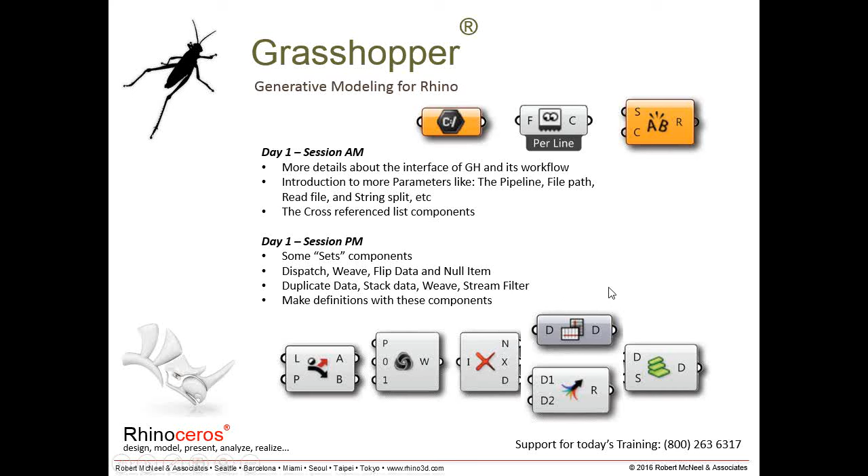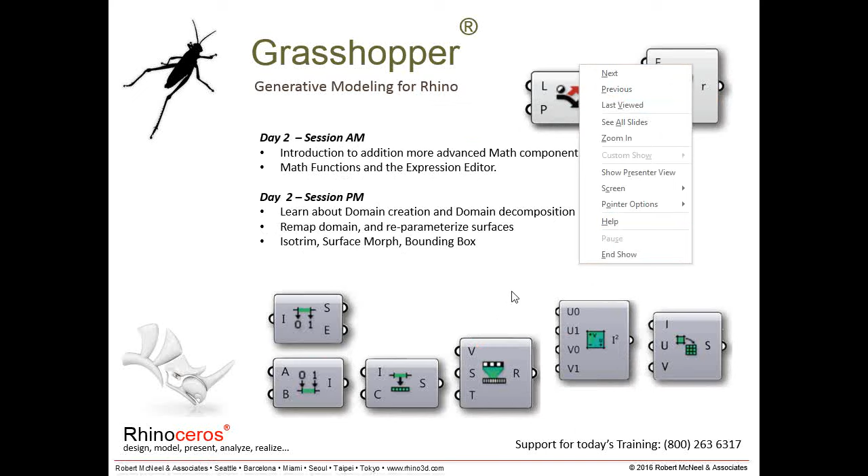One of the big topics for this class, as you saw from the outline, was working with data: splitting lists, using trees. We'll go over each of these outlines at the beginning of each session. Also domains and series, remapping domains, isotrim, morphing, surfaces and bounding box, math expressions, and some more advanced math components.

Parameter viewer, manipulating trees, flattening and grafting trees, exploding, merging, and flipping the data matrix. And then just making sure we get through lots of examples of working with trees, branches, and data components. So what I have for you is just some examples of the definitions that we'll be putting together.

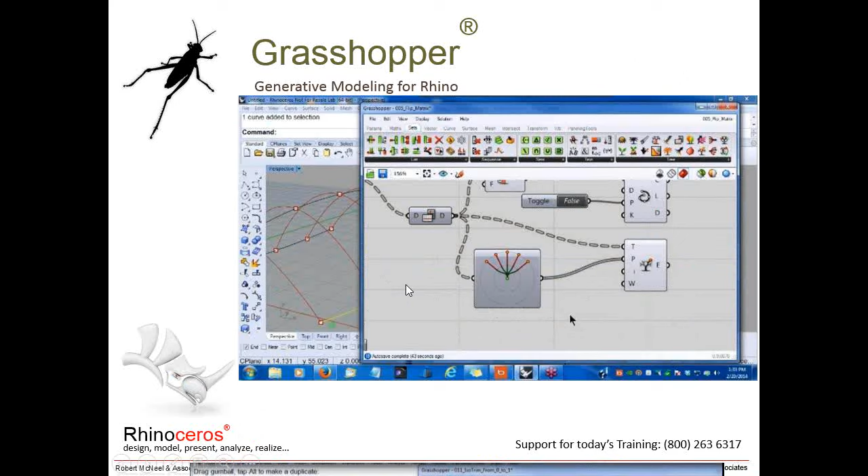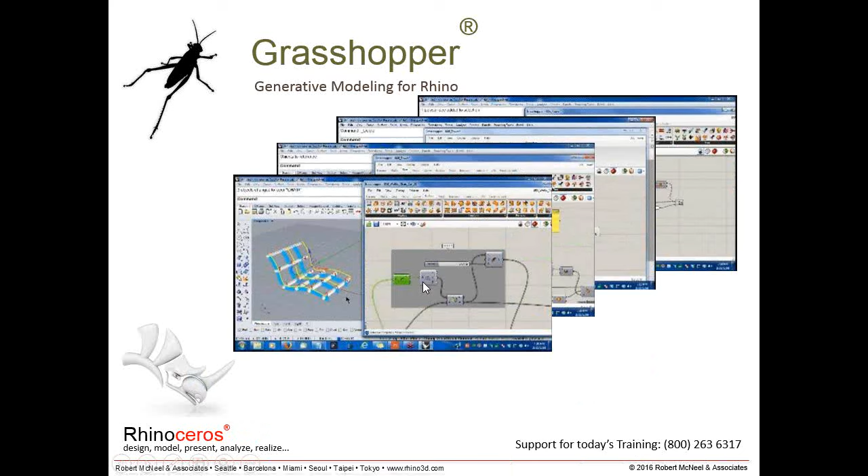So a graphical way of looking at what we'll be doing. And at the end of the training, that's our last definition. I just wanted to give you some idea of how quickly we move into the advanced material.

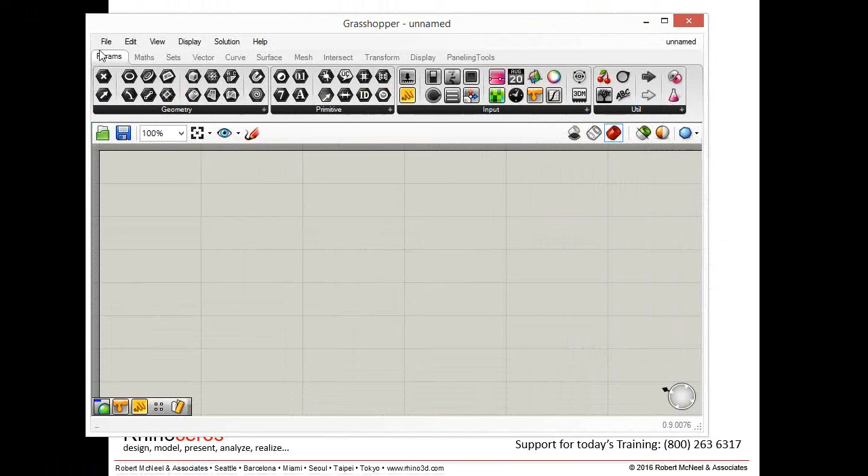The last thing I want to talk about is the path to components and parameters. If I take the curve parameter, I'll say it's located on Params, then on Geometry, and then I'll give the description of the item - so usually one, two, three. Those are the things that I will be chatting: Params dash Geometry dash Curve would be what we'd see in this case. That's really important. If I go to Vector and Point - this is the Construct Point - I'll say Vector, Point, Construct Point. Notice there's also a Deconstruct Point that looks similar but is very different.

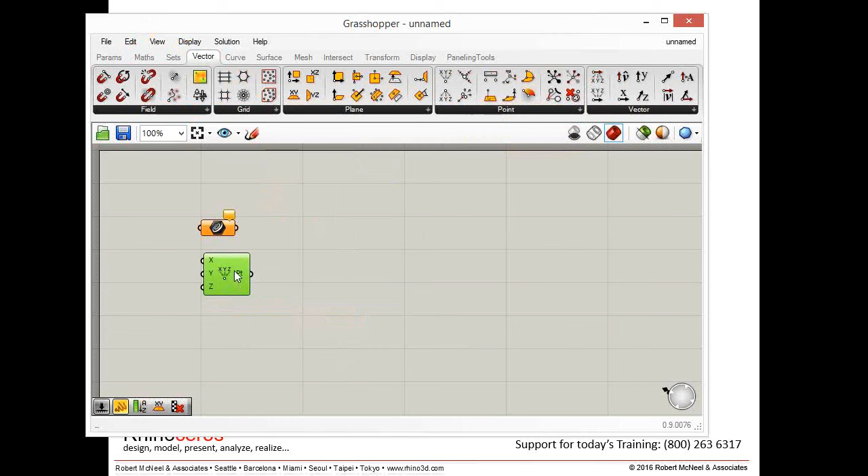If you can't find a parameter, we have a nice option where you hold down Control and Alt, which is really important as you're looking at Andreas's definitions. If you hold Control and Alt down and press on the component or parameter, the Finder will show you where it's at. One option is to double click on the canvas and type in the component or parameter you want to use. After you find it that way, you can hold Control and Alt down and it will tell you where it's located. So if you know the component you want is 'Random,' find the little kitty cat picture, hold down Control and Alt, and it will tell you where it's at.

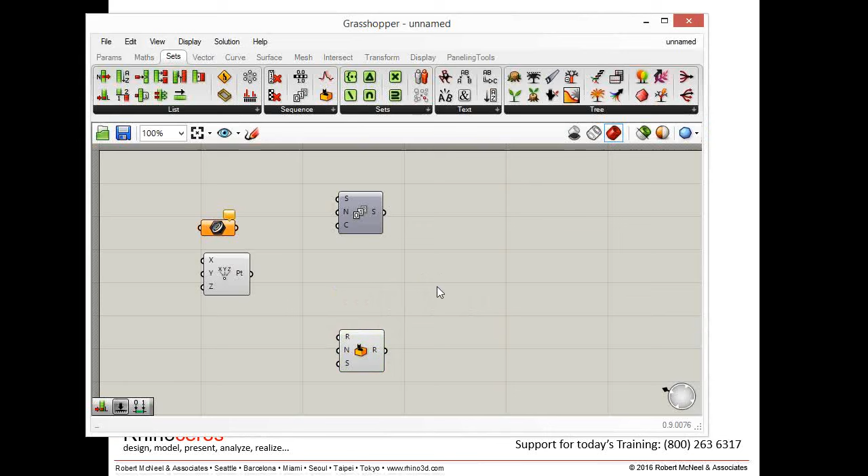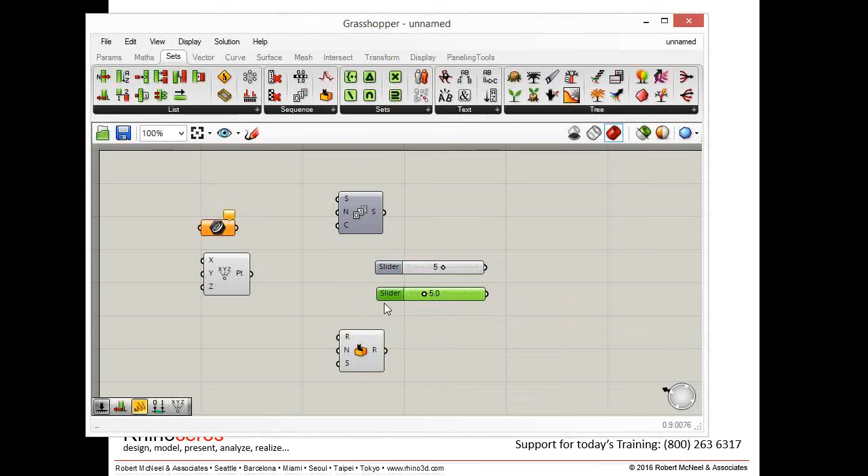That's a really effective way to find a component or parameter if you get behind - double clicking on the canvas and typing. If you type a number, you get a numeric slider. We can type in where we want the numeric slider to start, what value we want it set at, where we want it to end, and the precision. That's something you'll see Andreas do a lot, and if you weren't in a Level 1 class, that may go by really fast in the beginning.

Just a couple things that I know will be really important as you're trying to keep up with the training. Unfortunately, as you're watching the training live, there isn't a way to rewind like you can with a video, so let me know if you get lost or need help finding something. Here are some tips that will keep you up with the class, even if you get distracted and start working on a problem while Andreas is carrying on with the class. So with that, let's go ahead and pass the screen over to Andreas.

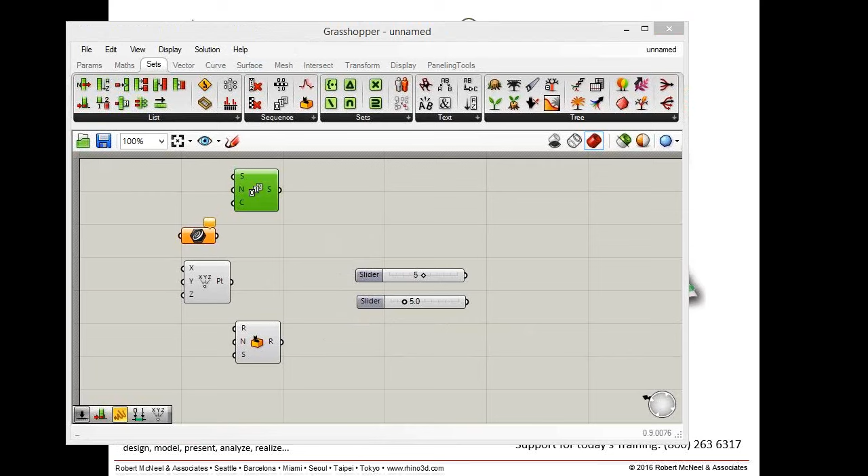So I saw that maybe 30% of the students took our Level 101 class, so I might go over a few things before we continue.

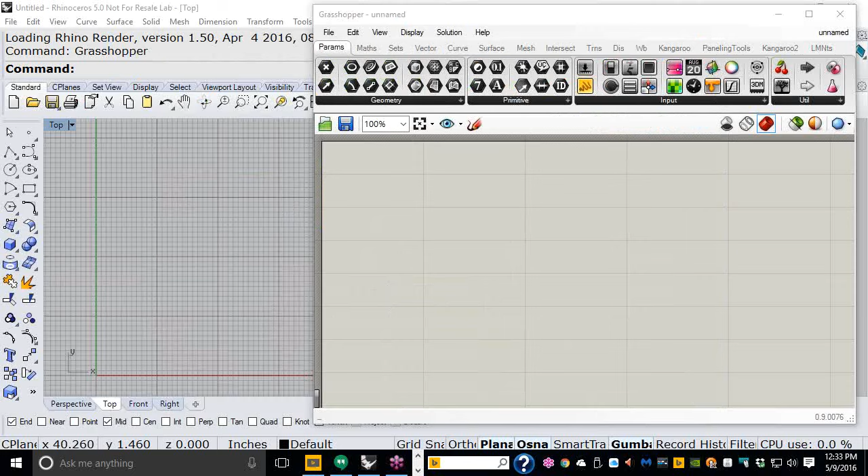Number one, I do want everybody to make a folder. It's a no-brainer, please make a folder. This is Level 102, and inside that folder, make one for day 01, another for day 02, and another for day 03. If you behave well, we might have the last one.

I am going to save all my definitions in each one of these folders, and at the end of the class I will zip all of them and send them to Mary, and she will do her best to post them the same day. So be aware of that.

Let me minimize this. Second, for this class you can change it later. Next week you can go back to how you prefer to work with Grasshopper. But for this week, for tech support, and if you have questions, we might be able to log into your computer and see what's working and what's not. So we need everybody to have almost the same interface with Grasshopper.

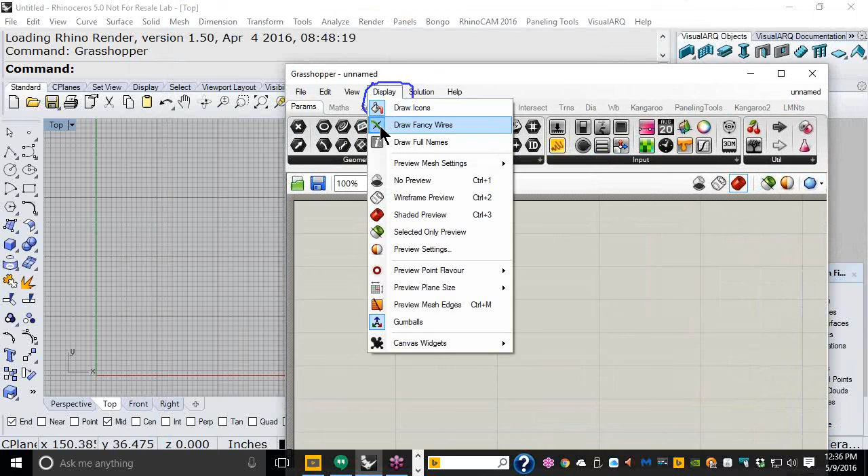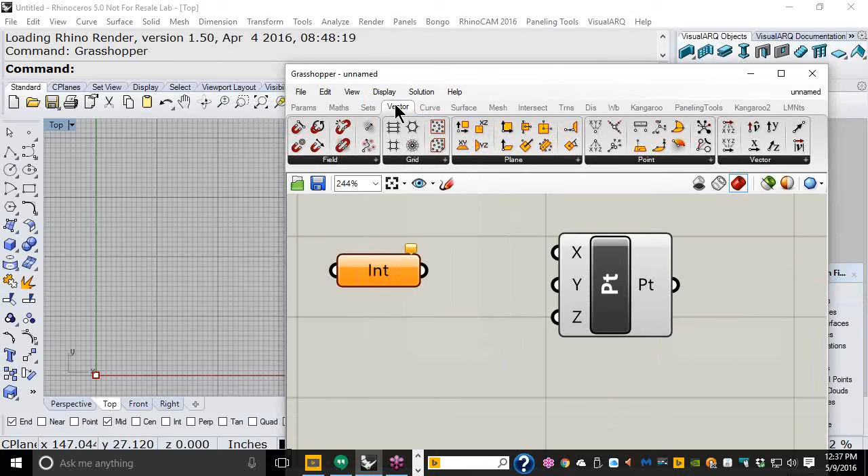Second, I do prefer for this class, as soon as you drag and drop either a parameter or a component, I would like everybody to use icons. You can set it to labels, that's fine, but after this class, not during this class, because it's quite easy for me to identify the icon and to help everybody if you send us a definition that is not working. Perfect, so now we have Draw Icons and Fancy Wires.

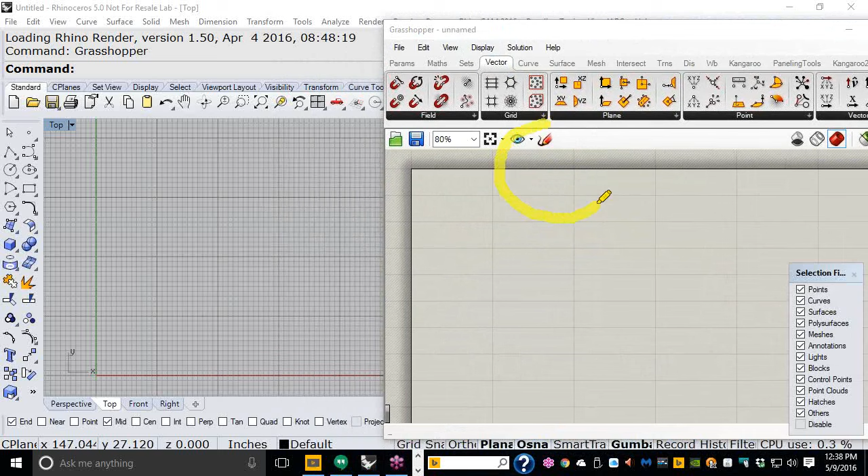Let me delete. Perfect, the next one — this is something I use from time to time on my definitions. I like to draw — let me show you where this one is, right there. Let me erase it, go back to normal. I like to draw something like this. But I can set, okay, that's what I want, and of course you can change the type of line, maybe this one, maybe you want it red — it's up to you. Once you say okay, I want you to see this, this is really unique and will organize things for us.

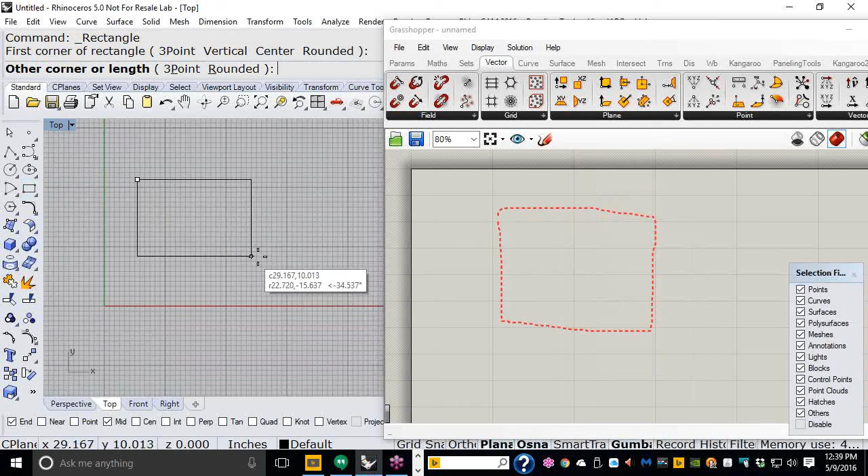I can come to Rhino. Notice that I am in the top viewport, and I can draw a rectangle right there. And I can right-click on this diagram and say please load from Rhino. So left click, select, enter, and there we have it, right there. Beautiful, beautiful, I hope you like that one.

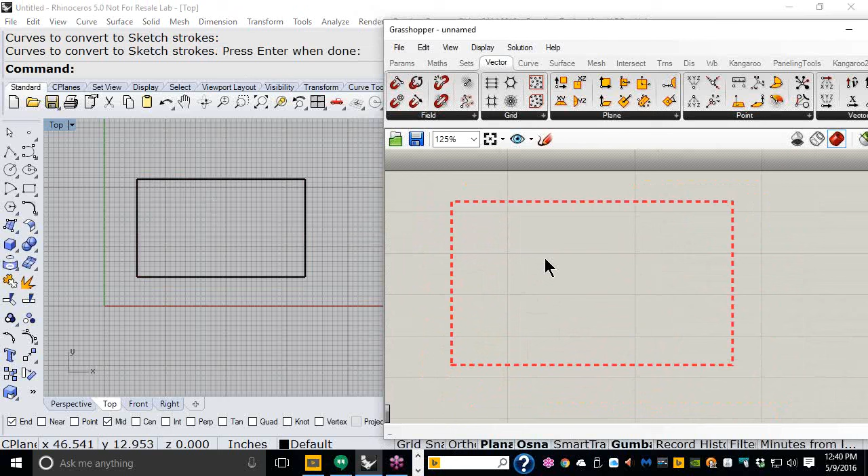I use these helpers to allow me to organize my definitions. And of course I can draw many things — I can draw a few things like this, load from Rhino, select all of them, enter, and there you have it. So you can bring almost any object you want.

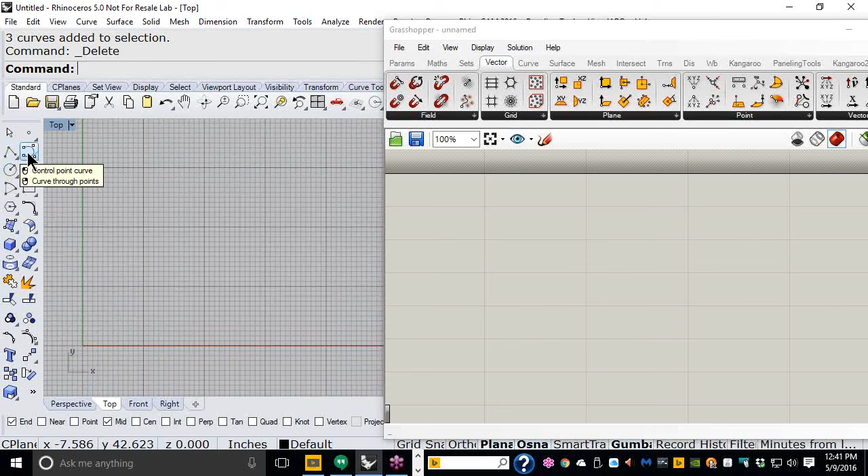Perfect, let me delete all of these and start explaining a few other things. We're going to start drawing 3 curves — they could be polyline, interpolated, or control point curves. So I'm just going to draw in the top view. Please notice I am not paying attention to the units yet.

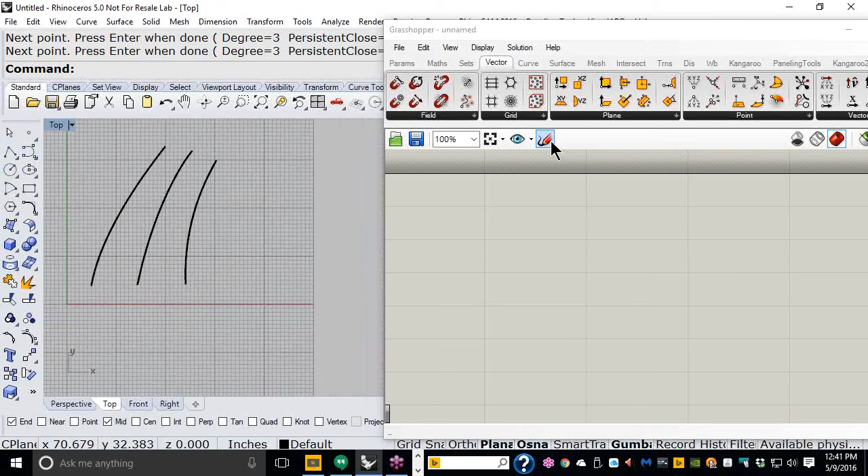How come that didn't work? I see somebody on my chat. It's quite easy: first you draw something beautiful — please do not copy my beautiful design. Say OK, then you select and right-click, and choose Load from Rhino. Go to Rhino, to the top viewport, select, right-click, and don't forget to drag — they appear right here on the top, so you have to drag them inside. Maybe that's what didn't work.

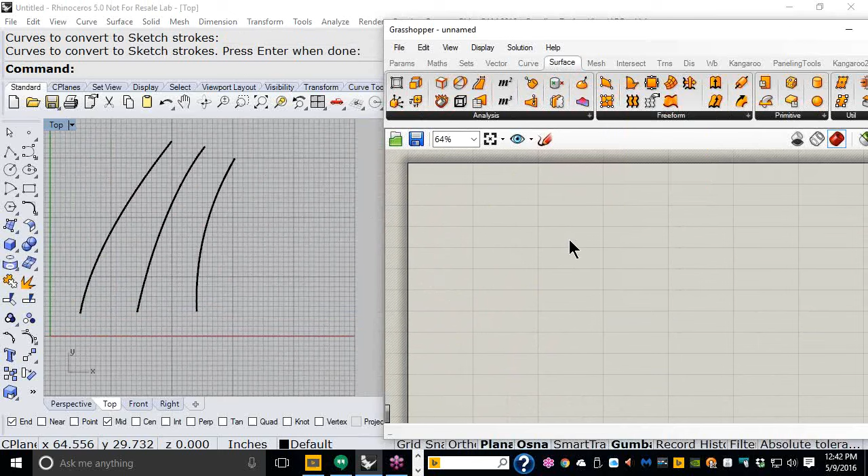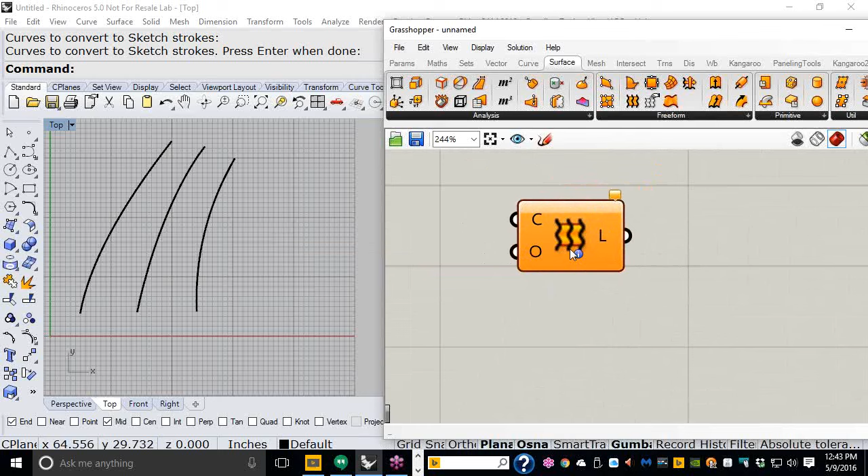Okay, so now that we have these 3 curves, I am going to go to the Surface tab and choose the Loft component. So drag and drop the Loft component right here. From time to time, so that it gets saved on the video that Mary is doing for us, I love to press Control, Alt, and left click — that will give you the path from where that component or parameter came. So we have the Loft over here.

And I need to select these curves, so I go to Parameters, and under Parameters let me drag and drop a Curve right here. Perfect. Let me zoom, right-click on the curve, select multiple curves, let me select all of them, enter. And now I am going to connect those 3 over here.

I know it is working because I drew my curves in order, and we're going to fix that later. We're going to be able to draw all the curves in disorder, and the Grasshopper definition should be smart enough to organize everything for us.

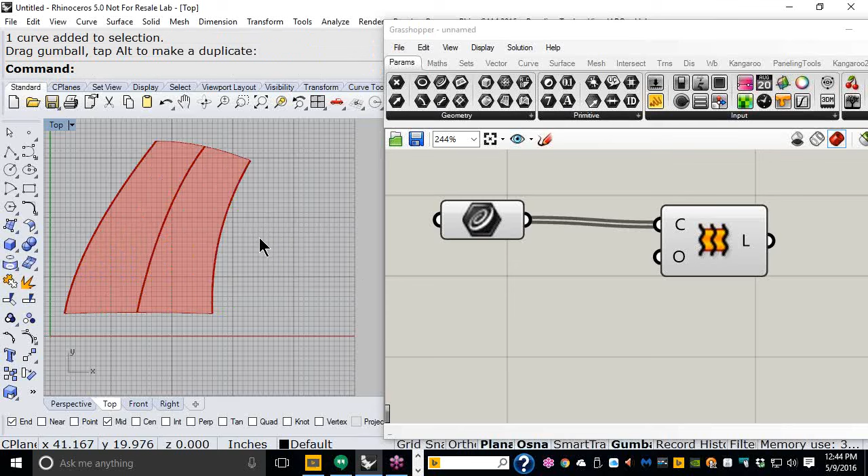So this is what I want to do, this is what I want to show you. If I right click on this parameter and go all the way down here, many people that use Grasshopper forget that we have this possibility. So I like to bring it at this point, and we can internalize those three curves.

So if I internalize there, and I go to File, Save, let me come over here to my computer, right there, day one. So this is my 001 definition. Internalize curves.

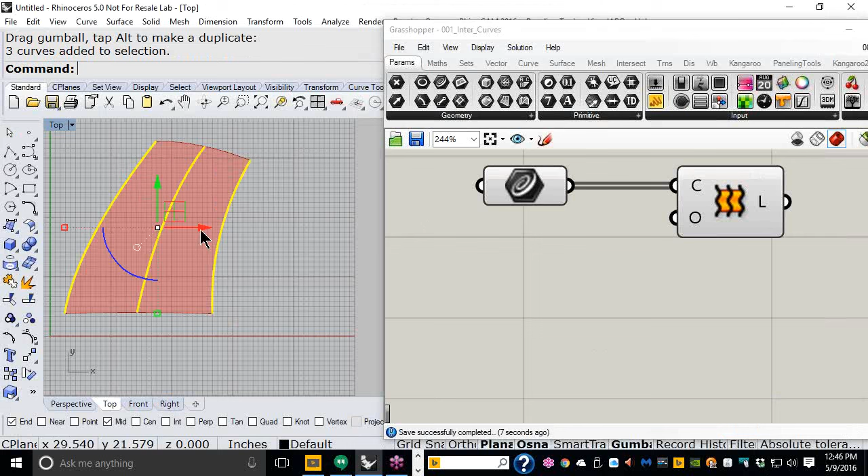If I save that little piece of definition, Grasshopper is going to save the curves. Notice, I'm going to delete my curves. I'm going to close, do not save there. If I go back and reopen my definition, bingo.

So I was able, just by selecting internalize data, to allow Grasshopper to save both the definition and the data from Rhino. So both will go into one file. But, there is always a but.

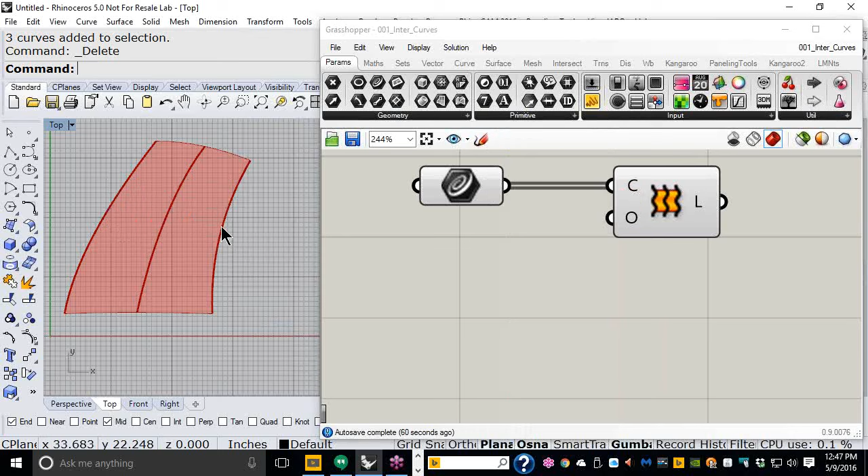Notice that I cannot select the curves. The curves are inside these parameters. So what do you do? You right click and you bake them if you need to use them. So let me bake them over here. And now notice that the curves are over here. Beautiful. And now I can pre-select them one more time.

All right, so be aware of that. Be aware of that. Let me select 1, 2, and 3. Enter. Beautiful.

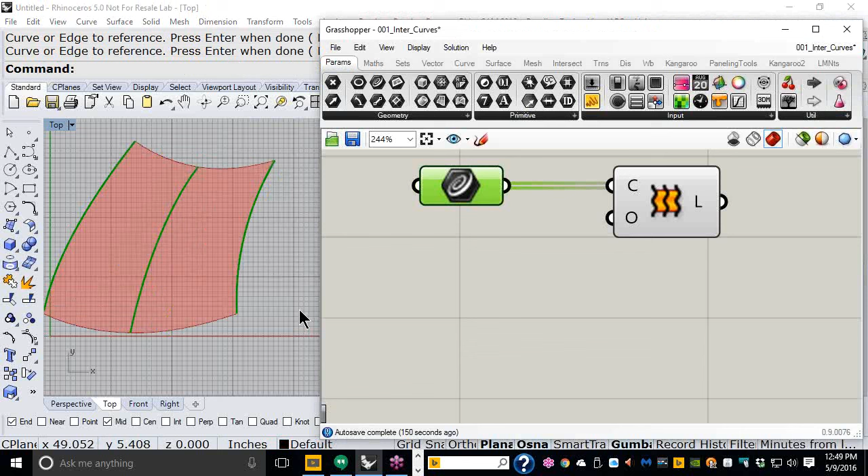So don't forget, internalize the data, that's quite important. In many of the exercises that we will do during these 4 days, I will internalize the data. If I do not do it, guess what? It's your responsibility to tell me. You have to tell me, Andres, do not forget to either save the Rhino file, or to internalize the data.

Excellent. So now that we covered all of that, let me delete everything. And this time, we're going to start playing with something more interesting. I want you to create a new document in Grasshopper, brand new document.

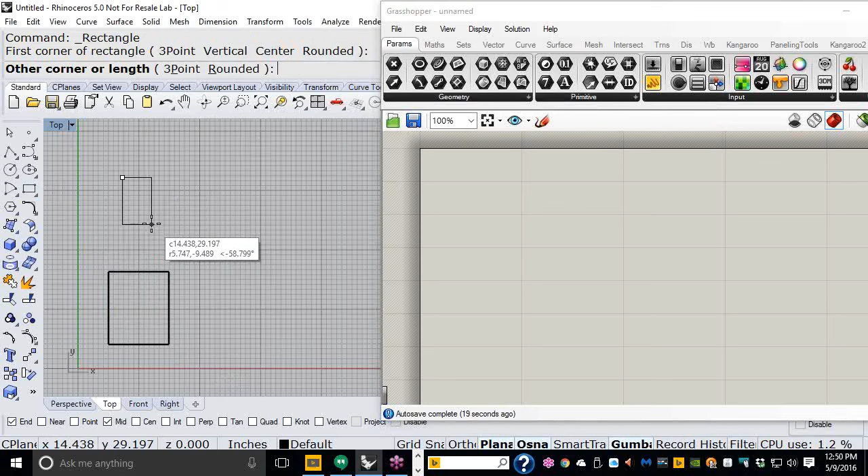All right. In Rhino, in the top viewport, I want you to draw 1, 2, 3, and 4 rectangles. Okay? 4 very easy 2D rectangles.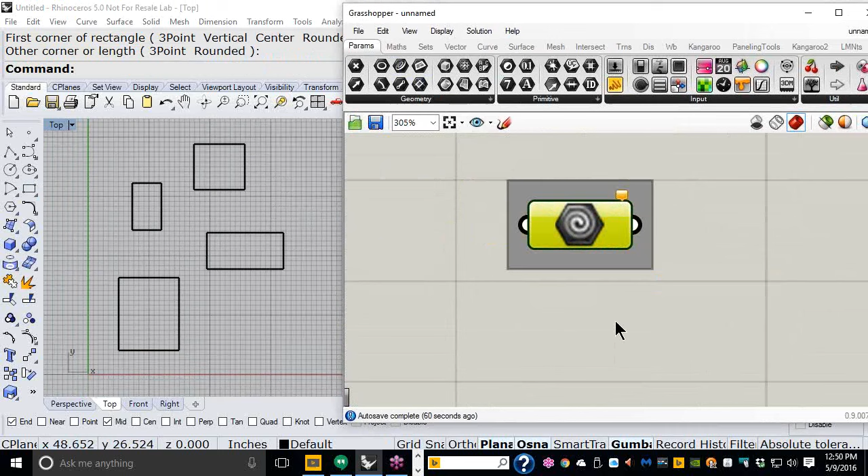Drag and drop either a curve or geometry parameter right there. And by the way, it is up to you. I love to do this: select, Control G. That will place a group on only one single object.

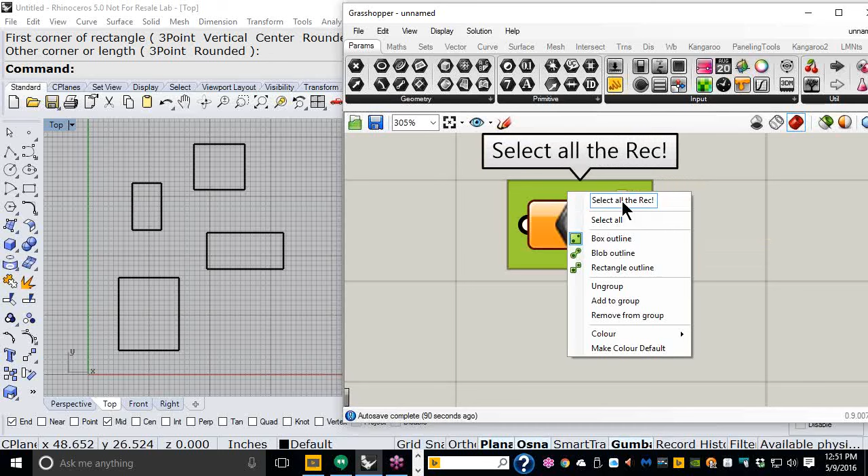And I love to do this because I can right click on the group and type select, all the rectangles. So as I go, I might be able to document my definition. This is up to you, you don't have to do it, but I love to do that. Perfect. So let us select all of them, multiple geometries, all of them.

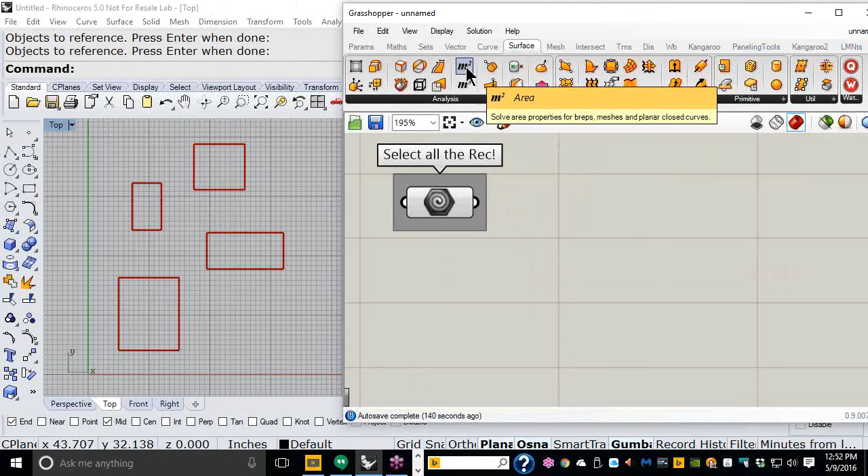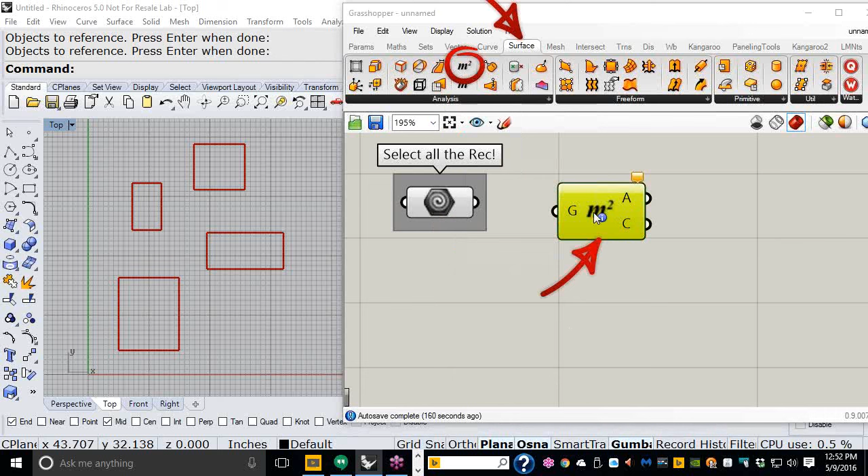And once we have all that geometry, I would love you to go visit the Surface tab and drag and drop the M2, we are going to calculate the area. All right? So drag and drop M2. And don't forget that you can double click the canvas and type area, and there you find it. So it is up to you, and there is the component. It's up to you how you want to bring each one of these components.

So we connect the curves to the area. And please take just a second and look at the numbers. On my computer, the lowest is something like 54 and the highest 174. So I will remember that. All right, so I need a definition that will allow me to select objects based on the value of the area. All right, so here we go.

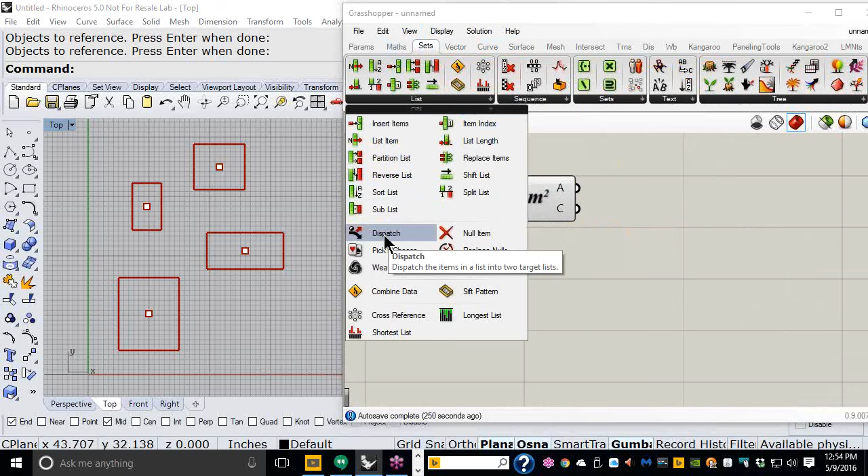Let's go to Sets. And under the Set tab, under the list, I would like you to drag and drop the dispatch. Dispatch, we're going to start playing with this one. I love to use this component a lot. So we have the dispatch, and we are going to connect all the values that we got for the area of each one of those rectangles to L. So we have 4 values, a list going into L.

Now we need to make a condition that is going to divide: whatever is positive is going to go into A, and whatever doesn't pass our condition will go to B. So let us create that condition.

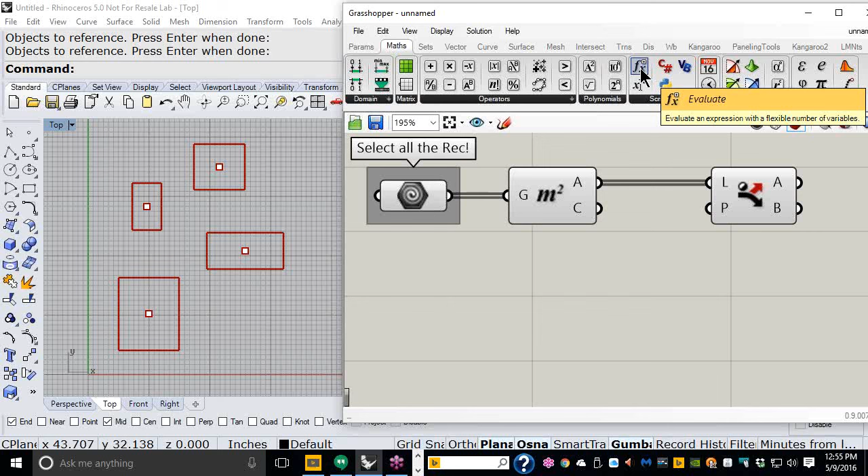Very simple. I would like you to go to the Math tab and drag and drop an Evaluate component.

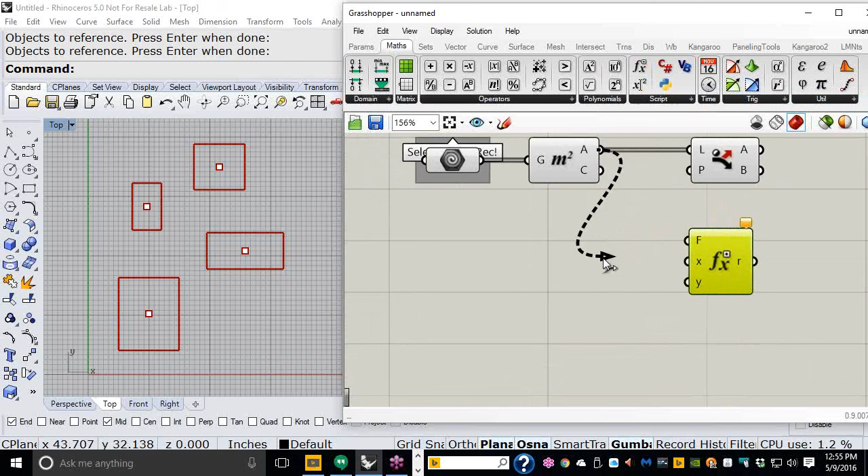What is it that we want to evaluate? We want to evaluate all these values there, the area of each one of these rectangles. So A goes to X.

And we need to have a numeric slider, and that's why I ask you to look at your values, because on my computer my numeric slider is going to go from 50 to 200, no decimal places. If you want a decimal place, just type 0.0, and that will give you one decimal place on your numerical slider. So if I hit OK, I get a numeric slider from 50 to 200.

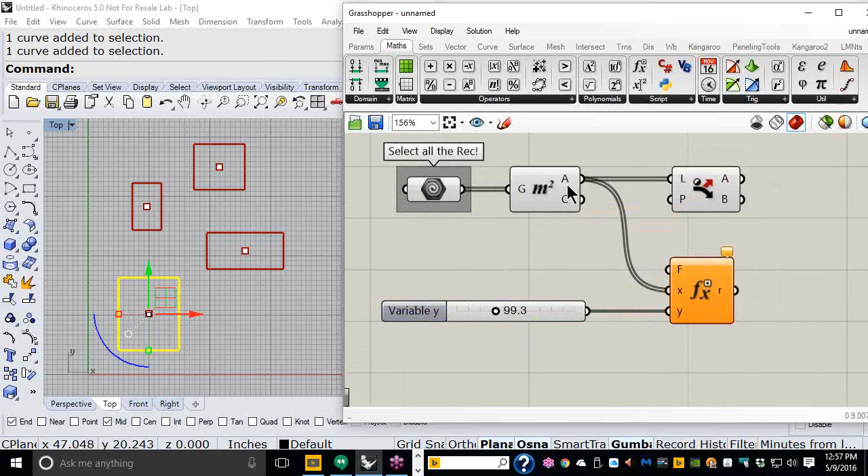I am going to connect this one over here, and this is the value that is going to set what areas I am going to let pass and what areas are not going to be able to pass the dispatch component. So here we are going to type the formula.

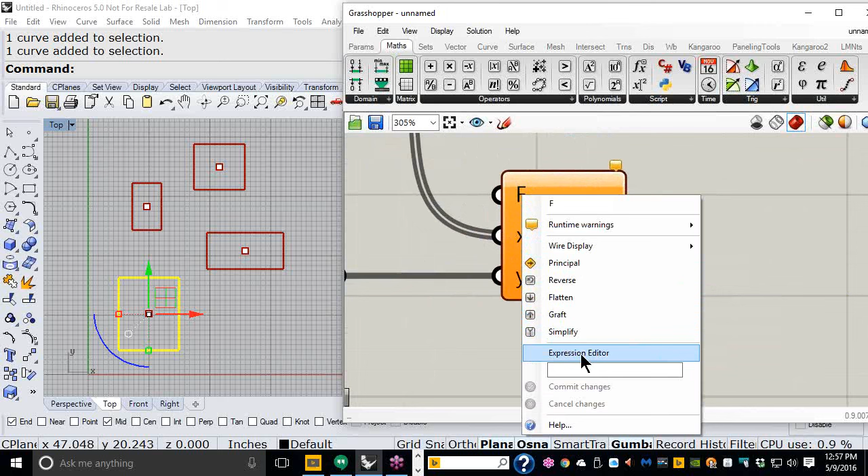Right-click on F and open up the expression editor. You should see this dialog box. First, do not panic—some people look at this and just give up, they just turn off Grasshopper. But this is quite simple.

One of the things I would love you to review, especially if you have free time during the weekends, is this part. Let me show you where you can get it, right there, on that corner. If you click on that little push button, you will have a list of all the functions that you can type in your expression editor.

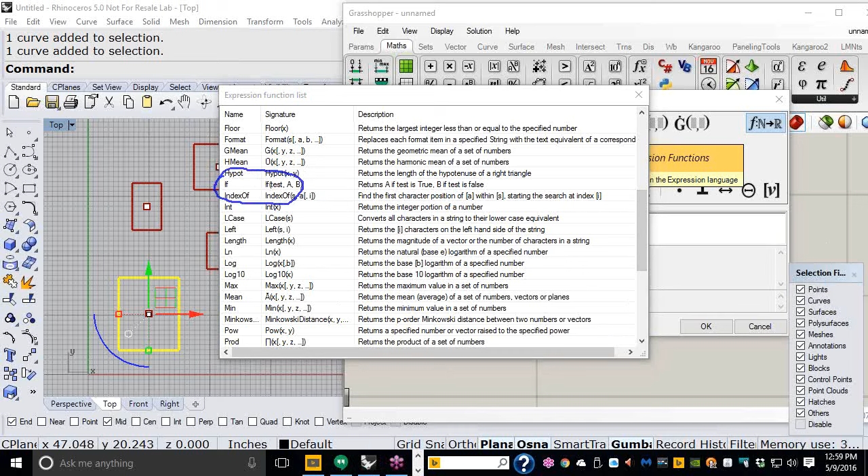And the one that I'm looking for is right here: if. I'm going to use this one. Let me erase my marker. So here we go. If—it doesn't matter if you do it lowercase or capital, it doesn't matter.

My condition is going to be like this: if, open parentheses, X—remember X is the value of the area, don't forget that—if X is greater, there is the icon for greater, than Y, if it is greater, comma, I'm going to set that to 1, comma, if it is not greater, I'm going to set it to 0.

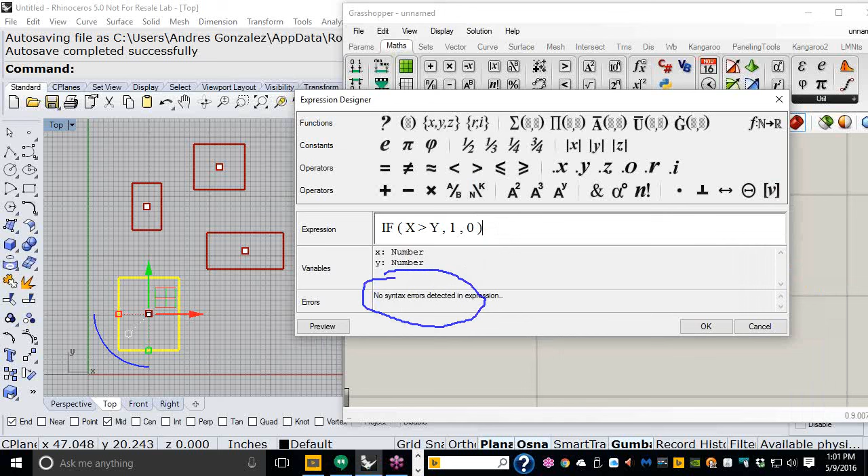All right, and let me close. Before I close, I love this because look, right here down here, it's telling me you have an error. Do I have an error? Yeah, you do. So as soon as I type my closing parentheses, no errors—it's beautiful. So let me erase all of that, and if I hit OK...

I would like you to see, and I love to place a panel just to see what comes out of here. Let me set the font there. So let's check: if I set my slider to 50...

The area of each one of these is greater than 50. If I set it to, let's say, almost 80, only 3 rectangles would pass my criteria. If I set it to, let's say, 150, only one passes.

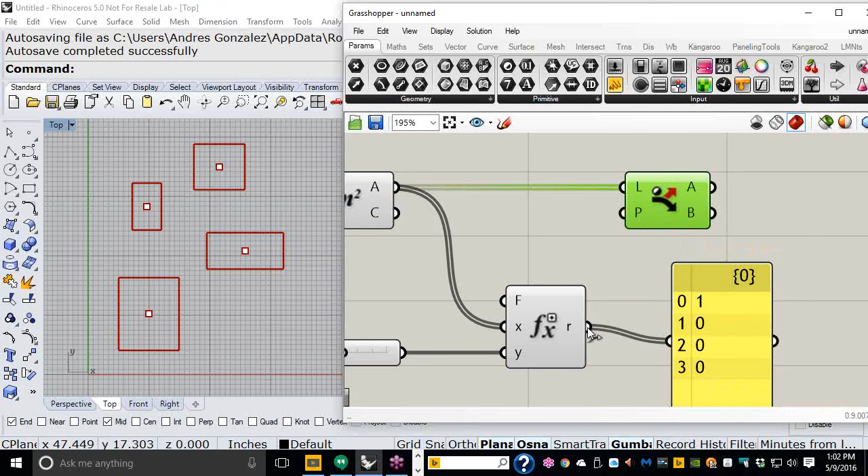So guess what, I can use this pattern and connect it to P, and that will filter all these values.

And if you want to select that one and show it, you can also get another dispatch, but this time you are selecting the rectangles, and you can connect the list of zeros and ones to the pattern, and that will do it. If you want to see it, let me add a planar surface to A.

Let me zoom in just a little bit right there. Beautiful. So if I scroll to the left, oh, there I have 2, there I have 3, all of them pass. Only 1, none. So as you can see, it's quite simple to use Grasshopper in order to filter some values, some geometry.

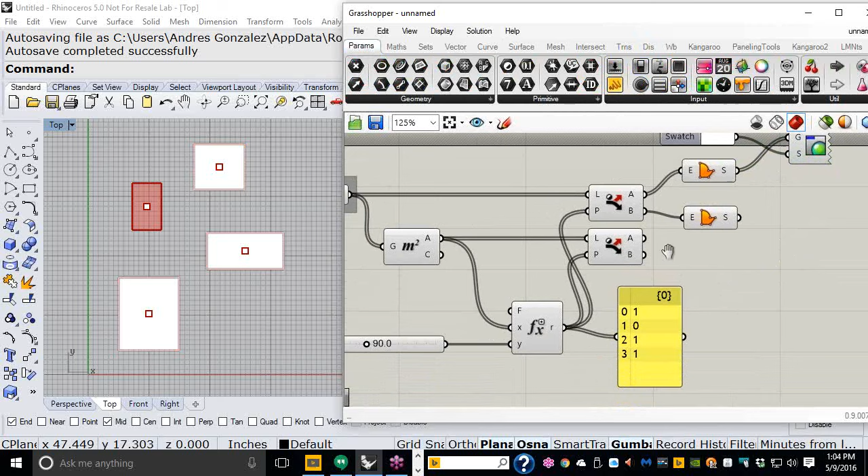Why do you have the second dispatch? This one will give me the value, just for display. This one will filter the values that do pass my condition. The first dispatch selects the rectangles. So one has the curves plugged into L, and the second one has the areas plugged into L.

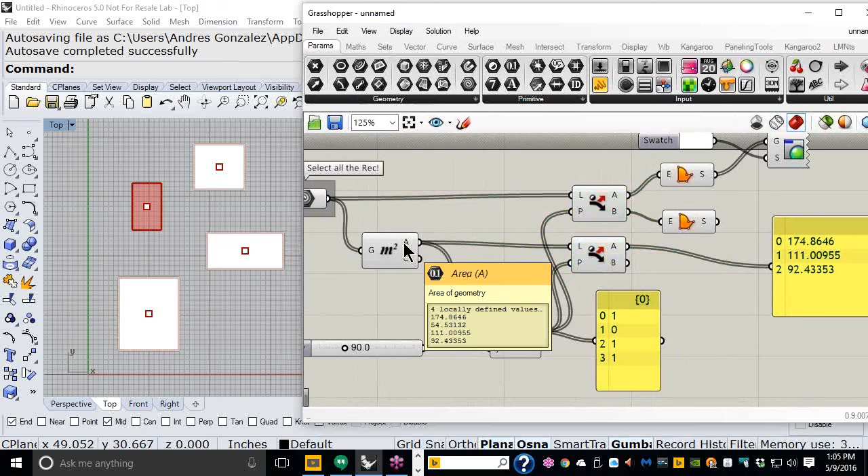Because I need the area in order for my eval to run the expression, and that will give me this list of zeros and ones. It's up to me how I want to use it. Let's say I have another dispatch over here, but this dispatch is going to select the center of each rectangle, and I'm going to filter the center with this. At each center I'm going to place a sphere, so only those that pass will get painted and get a sphere. We can set this one to 2.0 so the sphere is a little bit bigger.

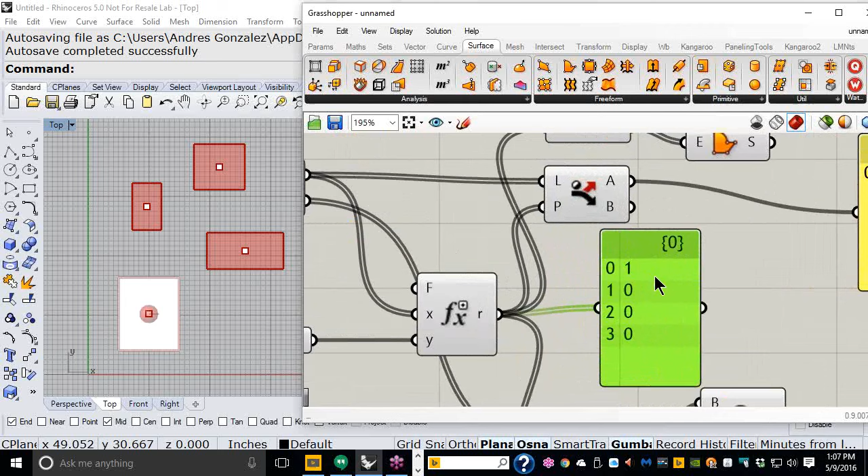So my main concern is to get this list of zeros and ones. Once I have the pattern, I can connect it to any one of these dispatches and filter the rectangles, the area, or the centers. Yes, you can filter almost anything, and we are going to filter a few things in just a little bit.

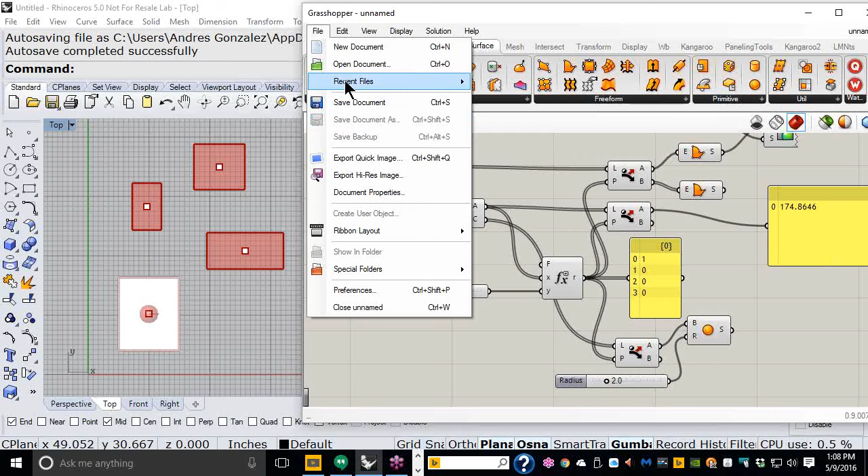So I am going to save this one and internalize the data, and we're going to do another little exercise with this in just a little bit. Let me save as - this is 002, dispatch area. Save it. Any questions with this one?

Can we jump to the next one? Perfect.

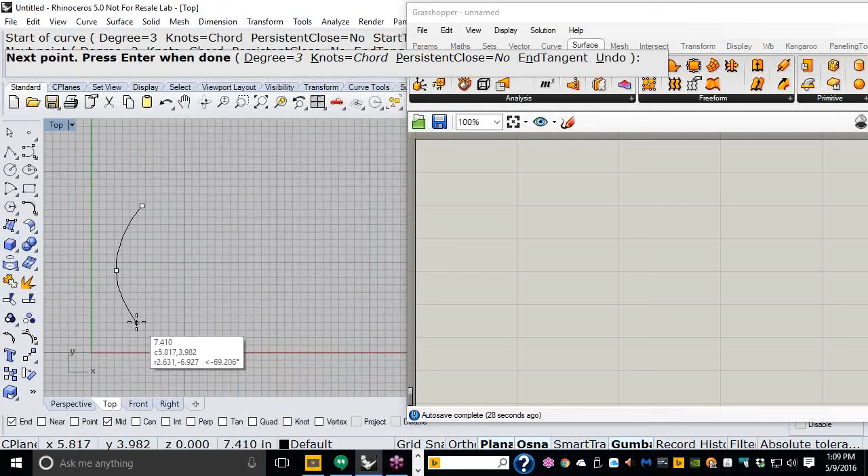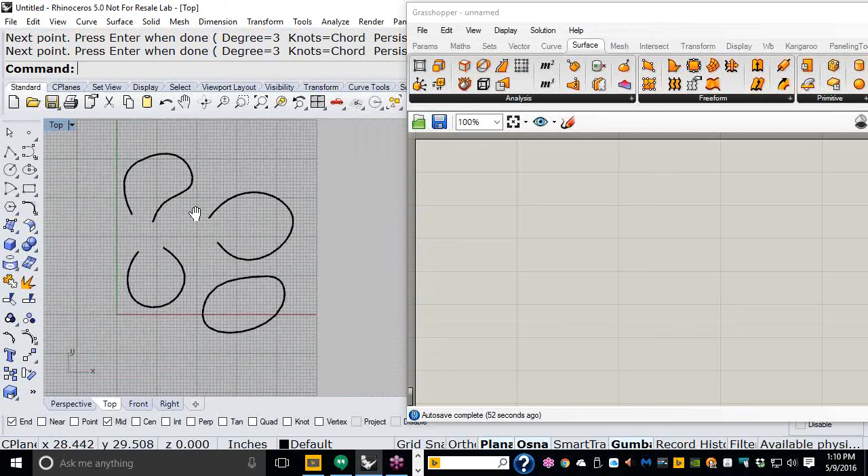All right, close this one, create a brand new document. This time, this is how I use it from time to time, especially when people bring a drawing and they want to send that information to the laser or to a CNC machine. I'm going to make it very obvious, but this is what happens - all the curves are open. Let me do another one over here, and another one over here, and maybe the last one - oh yeah, that one is closed. All right, so that's what I have, and I need to check that drawing before we continue.

And don't forget, if I want to make this really hard, I could do something like this. Look at this - it will be really hard for anyone to see that this is open. So sometimes I love to run this definition when somebody brings this type of files.

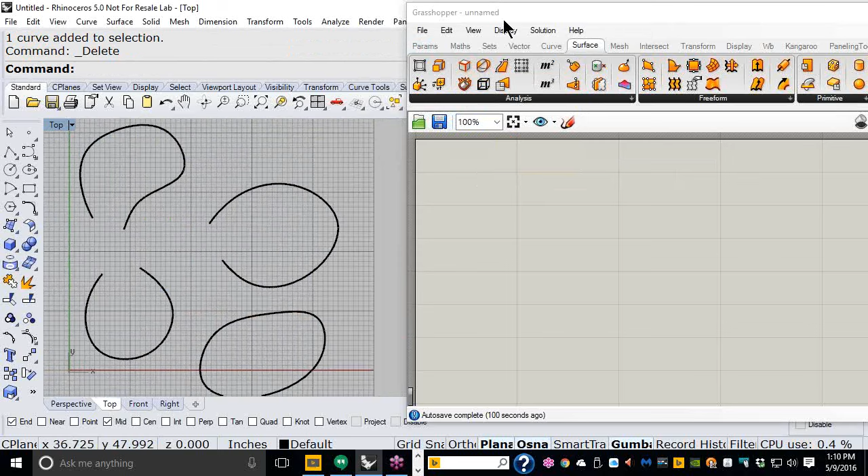So here we go, step number 1: we are going to select all those curves. Right click, multiple. We then go to Curves, Analysis, and under Curves we are going to check whether or not they are closed or open. Right there.

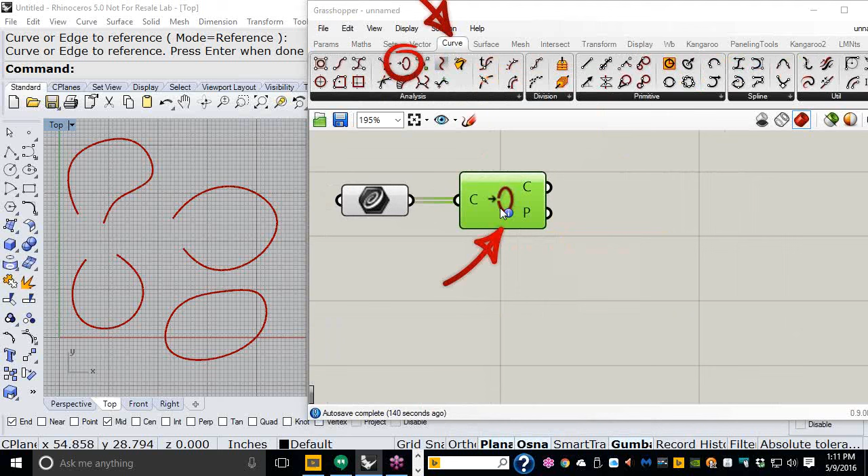Let me show you - this one comes from the Curve tab. And if I look at the value, the list of values from P, notice that I have false, false, false, true. That means 0, 0, 0, 1.

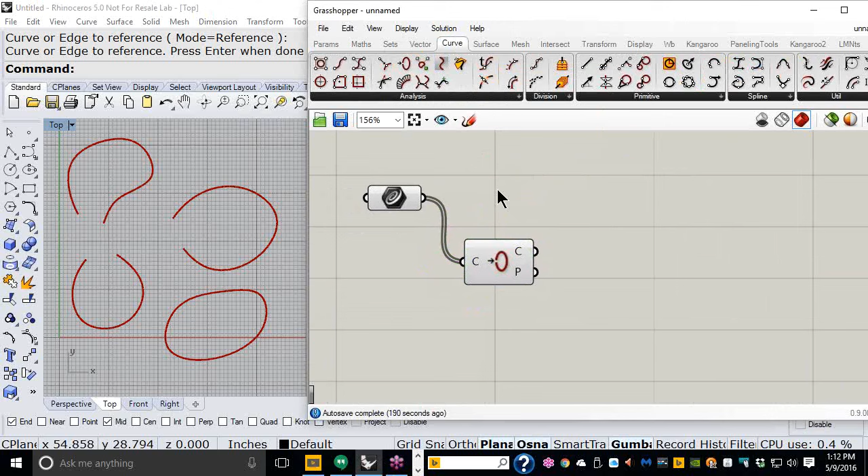So this is what we are going to do - we're gonna fix all those curves. How? Very simple, dispatch. We are going to select the list of curves and connect the pattern. So as you know already, only one is closed - that one. So what are we going to do with the rest?

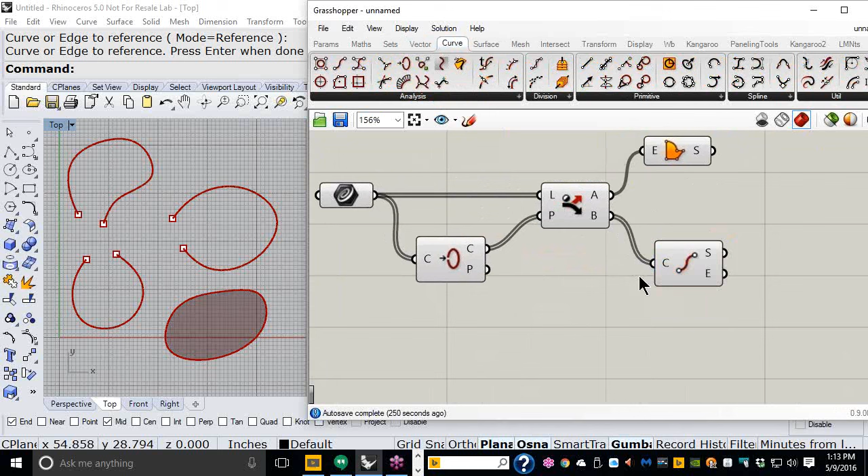Quite simple, here we go: Curves, Endpoints. So we are going to find out the endpoints for all those curves, and we are going to draw a straight line in between all the start of the curves and all the ends of the curves. There - and that will be one option to do this.

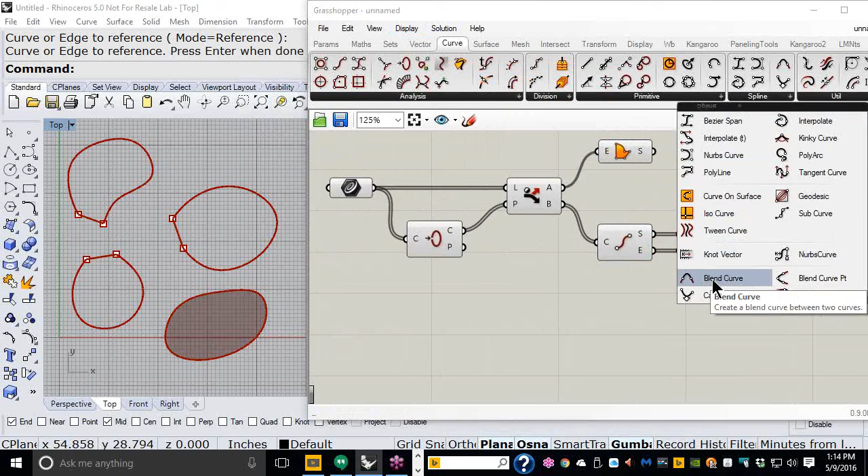But I want you to see another possibility that I like a lot, and that one is right there: Curve, Splines, Blend Curve. All right, right there. Let me show you where I got this one from - Curve Splines. So we are going to take all the open curves to A and all the open curves to B.

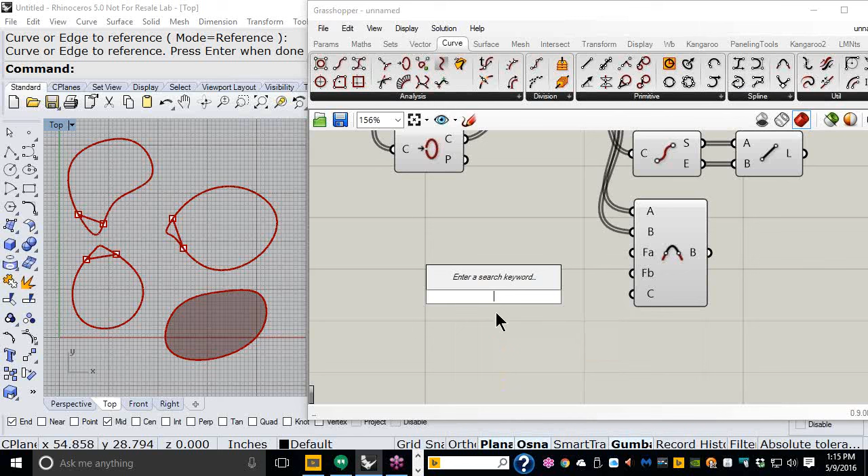And then if we analyze this component, notice that down here we have the possibility to close those open curves with either a straight line position, with an arc tangency, or with a very nice curve, degree 3, if we set it to curvature. So over here I would like you to make a numeric slider that goes from 0 to 2.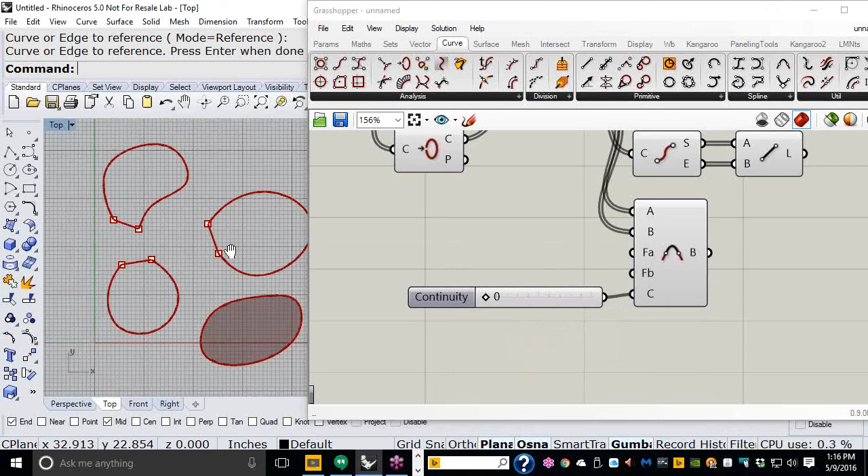And if you hit enter, notice that now we can set how you want to close those curves. But even better, you have the possibility to control the force - how much power are you giving to this blending. So I'm going to create a slider, 1.00, enter, 1.00, enter - that will give me a slider from 0 to 1.

Copy and connect this one to FA and FB. And look at this - ooh, really nice.

Okay, so now you control how you are doing the blending in each one of those curves.

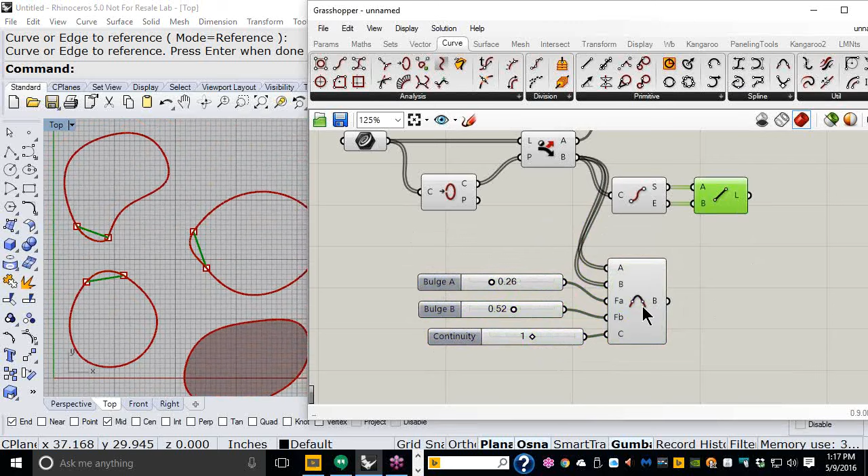So for this exercise, I only have one more option. But before I do so, I like to select all of these, press the space bar, and disable the preview, because I start to see a lot of points all over the place. So select, press the space bar, and there you have it. You want to disable the preview.

And now it is up to you if you like this option, which, by the way, is setting this one to 0. But let's say we didn't have that option, we only had 1 and 2. So I'm going to make a multiple choice, so I have the possibility to choose either the blend or this one.

Yes, I believe somebody has a question, Mary. Okay, Kareem, do you want us to unmute your mic or do you want to type it in? Let us know. Okay, go ahead. Okay, can you hear me now?

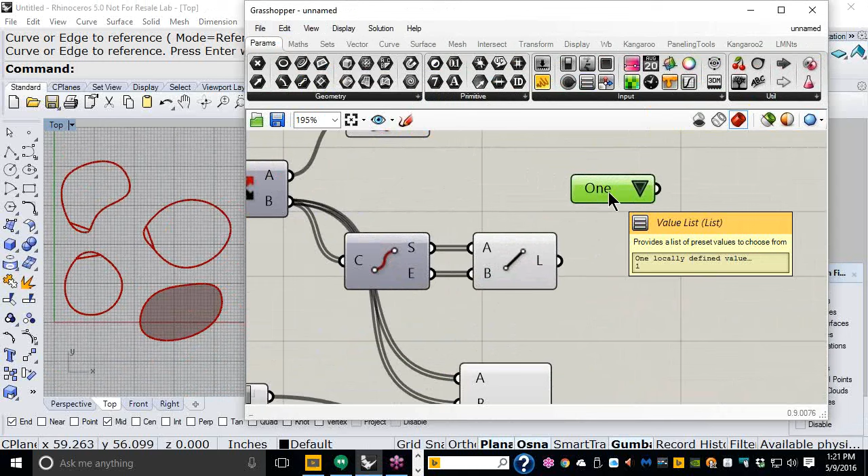Value list - drag and drop one of these. We're going to use this one a lot during these 4 days. So right click, edit, and delete all of this.

And we have only 2 options. I love to say option A is lines, and that is equal to 0. That's the most important part. I don't care what you write on the left side, but I do care that after the equal sign, you set it to 0. Enter. And option B is blends, and that's equal to 1.

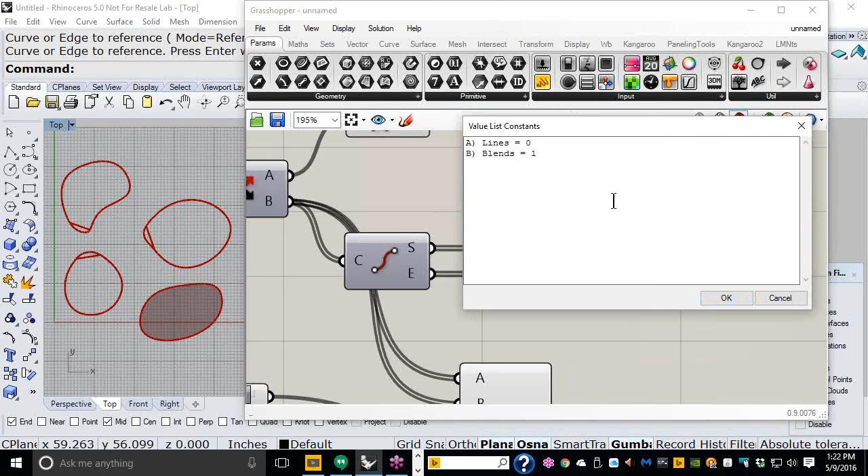So we have straight lines or blends. If I hit OK, notice that you have those 2 options, lines, or you can select blends. By the way, if you right-click on this component or this parameter, you can set value cycle. That means you can left click and cycle through the list. But I'm going to leave it as drop down list right there.

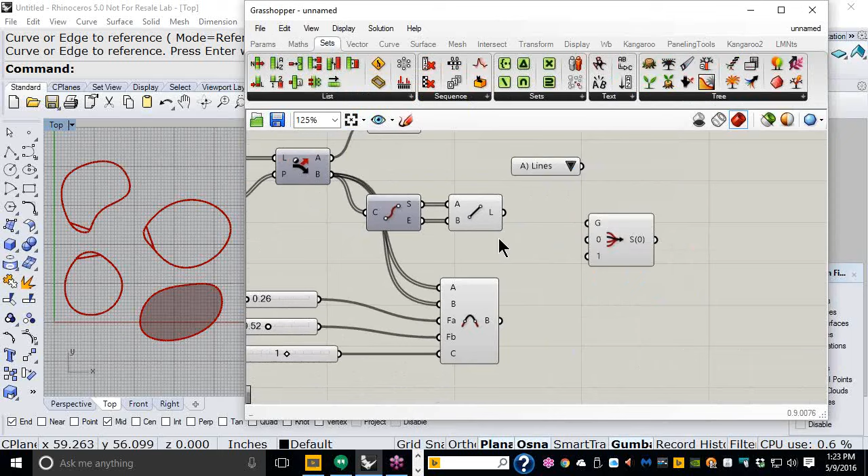And almost always this parameter goes together with set, tree, and a stream filter. Right there. Let me move this one over here.

And it's very simple. This value list is going to control the gate, the door, the garage. Lines will go through door 0, and the blends will go to door label 1. So only one of these 2 will be able to get out. And it's up to you. If you set it to blends, notice that it says gate 1 is going out. If you set it to lines, gate 0 is going out.

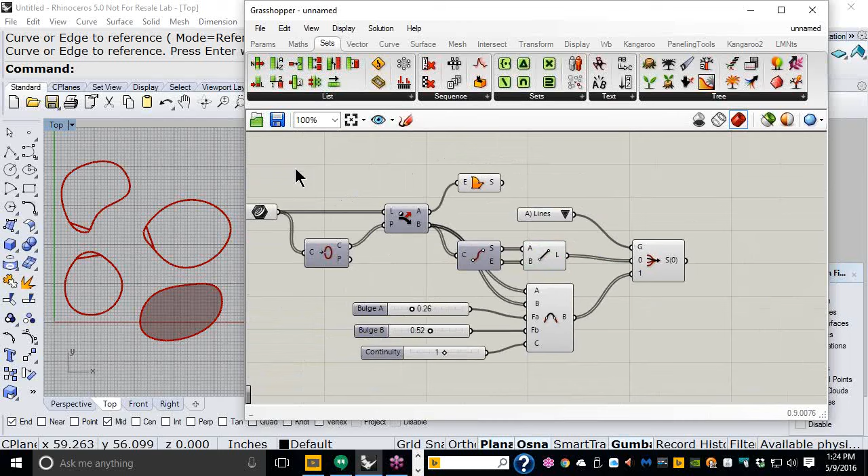So now that we have that, it's a good moment to come to Curves, Utilities, and use the joined curves there. And you are going to connect this one over here, all the curves that are open, and press the Shift key and connect this one over here. And now those open curves that came on that drawing, I know for sure they are closed.

So we can also create a planar surface, and I like the blends there. Beautiful. So now we can disable and disable. Beautiful.

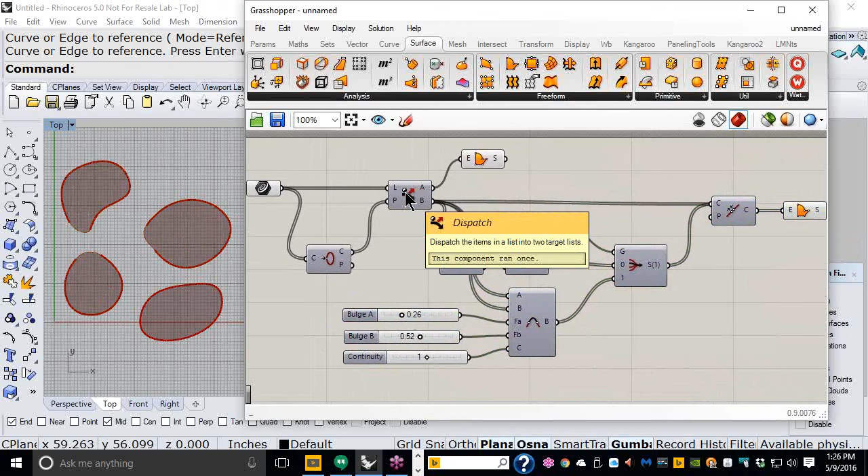Okay, I am going to right click, internalize my beautiful curves, and go ahead and save it. 003, dispatch, closed curves. Perfect, okay.

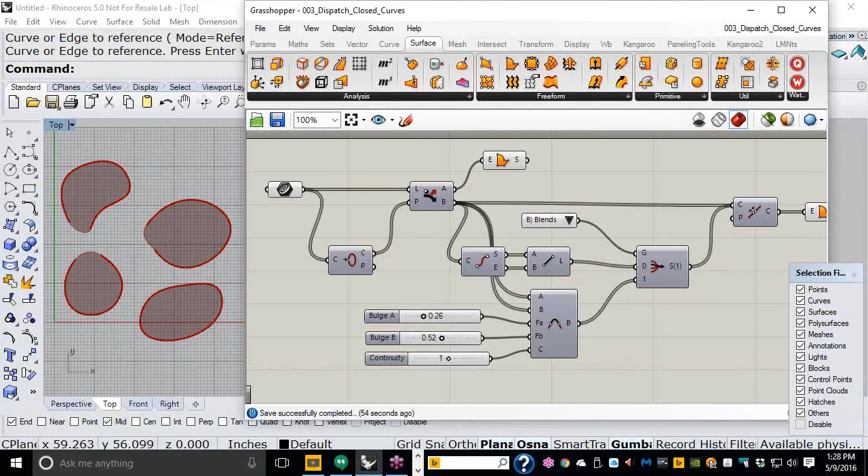So the next exercise is going to be very simple, so that we have the break and start playing with some files that Mary gave to you. And this is a good moment - from the materials, make sure you have something like this. I believe something like this: 105 DOF XYZ.

Okay, Michelle, the next exercise that we are going to do after the break will more or less answer that question. But you have to have this file, and let me see if I can open it. There, right there. We need to have this TXT file. This is an ASCII file, and we're going to read it and change it.

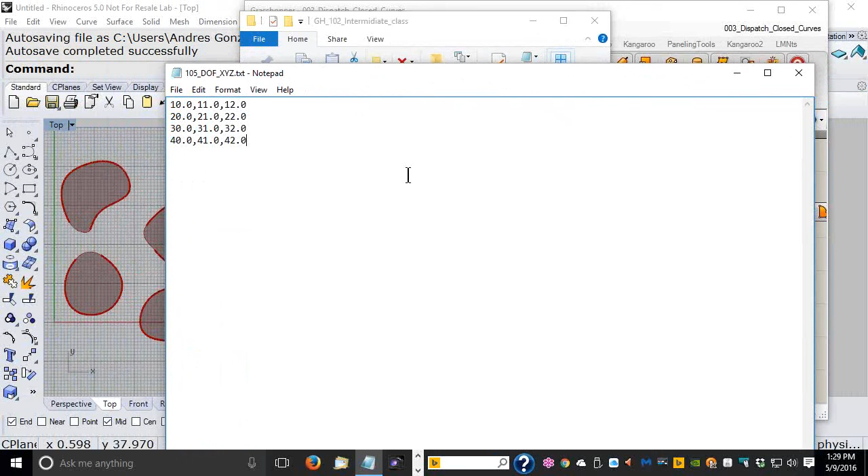I can post it to materials just by itself too, Andres. Yes, or please, after break. Yeah, yes, after the break. Okay, so 10 minutes, we'll go ahead and stop.